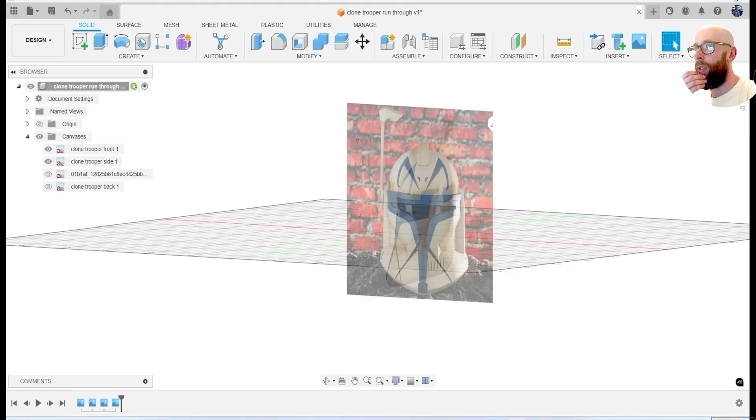Okay, so I've already got my reference images installed. So if you can't remember how to do that, make sure you go to Insert and Canvas. I'm going to put a link to where I found those reference images.

So starting off, to get the shape of the helmet, I'm dropping over to forms. I grabbed a quad ball, and what I'm going to do is just try and match the overall shape, delete the bottom part, grab that bottom edge, scale it flat, and then drag it down to get the overall shape. If you followed along to the Mandalorian helmet, you'll notice that originally what I did was a quad ball and then joined it with a cylinder. I found this basically cuts out that step.

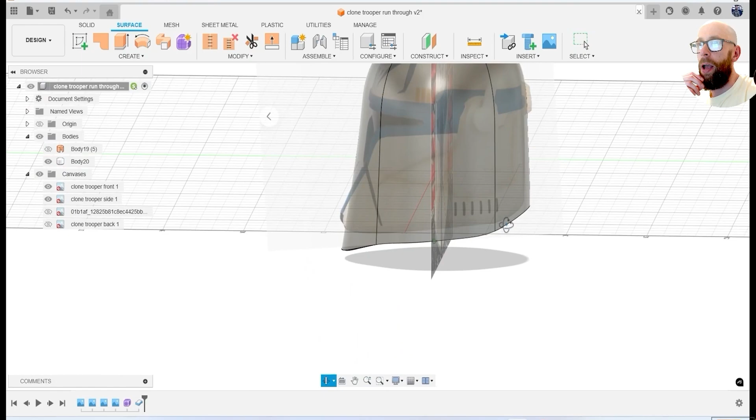Then making sure you select symmetry, it's just a case of dragging the vertices to match the overall shape as much as possible. It is worth every once in a while clicking finish form just to make sure that it does finish. Because if there's errors inside the form, it won't let you go past that point. Then into surface, and then thicken it a little bit just to make sure it's actually a solid shape.

And then it's a case of trying to cut some details into the front. So I start with the visor, I do an offset plane, and then I try and trace around the visor roughly where I want it to be, basically using a lot of lines, arcs, and then fillets just to round those all off a little bit. Now I will always do it on one side and mirror it over, because apart from the scope on the one side, the rest of it's completely symmetrical. So there's no sense trying to do it on both sides if it's not going to match up perfectly. So I do a lot of symmetry based stuff.

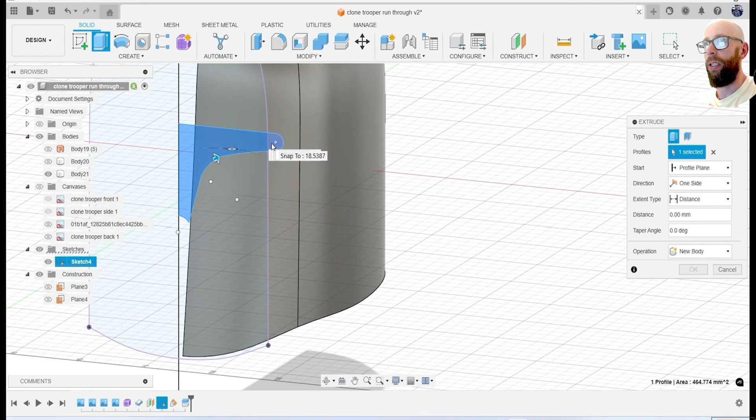So then it's a case of extruding through and cutting through the actual visor. We do the same sort of technique for the rest of the details, like the blue bits that you see, but rather than cutting, what we're going to do, and you'll see in a second, is do intersect. So when you're intersecting, you need to make sure that you copy and paste the original body you're going to cut through, because it will get rid of that.

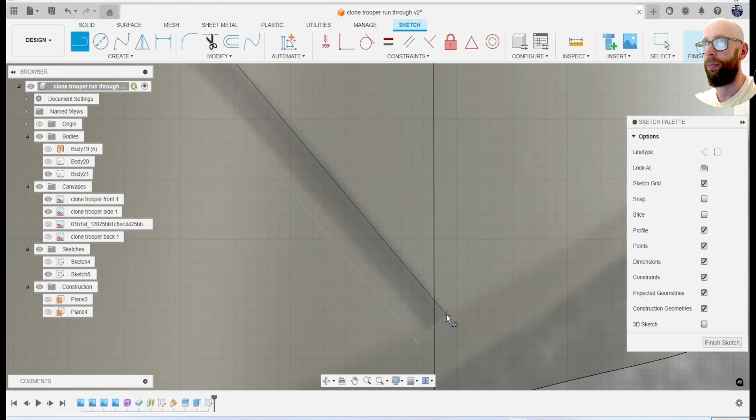So all I'm doing now is tracing around the rest of the details on the front of the face that I want to do. Again, lines and arcs, trying to match up as much as I can. If it doesn't meet it perfectly, it's not the end of the world. So you'll see, as I said, I'm only doing it on one side.

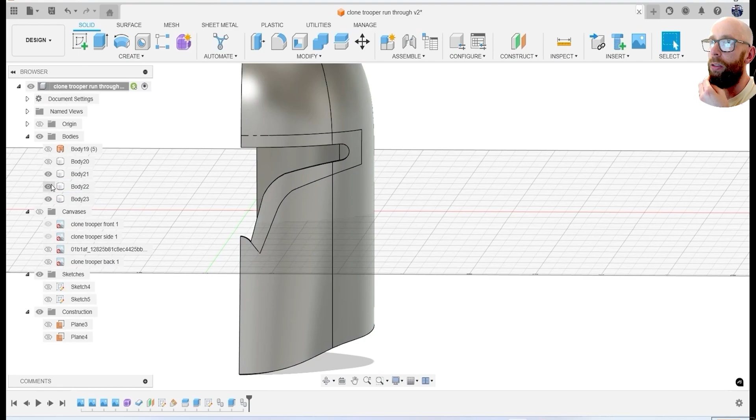Once I'm done, checking that it's all closed profile, and then it's a case of dragging it all, cutting through, and you see I change it there to intersect, so you end up with those extra little bits. Now originally I did it all as one, but then it joined it together, which I didn't want to do, so I ended up having to do each step individually. So copy and pasting the main part of the helmet a couple of times, just so you end up with that little detail there. And I do that for each one of those little bits that I want to stick out.

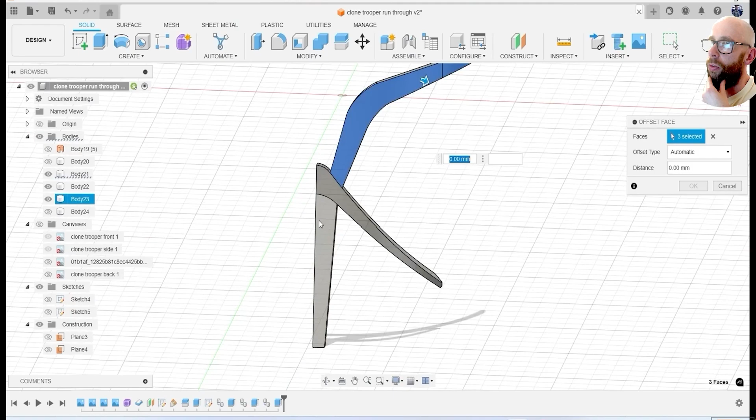Once you've got those little details, what I then wanted to do was press pull the faces to make them actually protrude out of the front of the face a little bit. So under modify, you've got press pull, click on all the faces and drag it out a little bit. You don't want to go too much. I only did like 1.2 mil in the end. You see it's starting to stick out a little bit. Same with the little bit there as well.

And then it's a case of rounding off the edges, trying to get those details as close as possible. And again, trying to do the bit at the top as well. You'll see me jump around a little bit. So I've started to do all the details on the front. And because I didn't know how far it was supposed to wrap around the whole helmet, I ended up jumping to the bit. So you see there, it kind of comes a bit too far. So I wasn't sure how far I needed to do it.

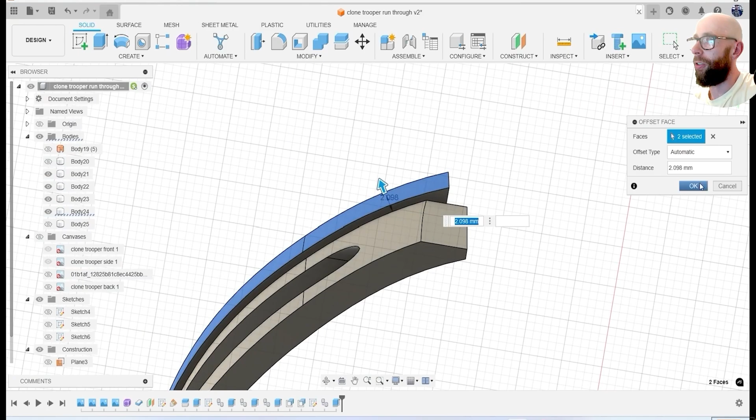So again, you'll see me do the same thing where I press pull to make it a bit thicker. But then after a bit of playing around, which is why I speed these up in the end, because otherwise it's just me sort of mumbling to myself as I'm trying to figure stuff out. So you see me sort of play around with it a little bit. I end up moving up to doing the bit that you see on the side of the helmet.

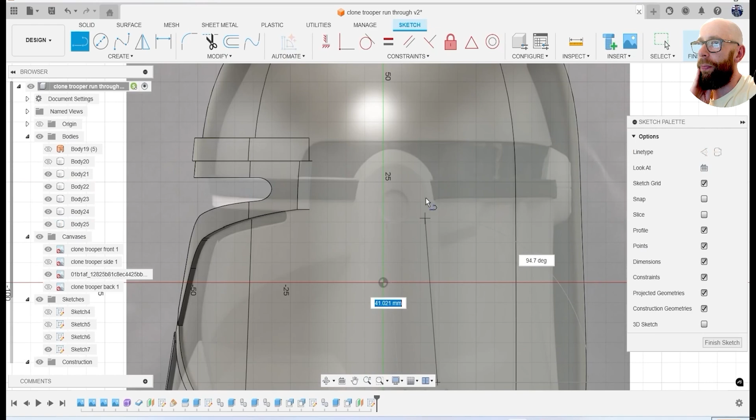So again, offset plane, create a sketch, start tracing out roughly where I want this detail to be. Basically, when I'm sketching, it's all lines, it's all circles, it's all arcs. So originally, I thought it looked a little bit too big, so I tried an arc, and it looked a little bit weird. So I jumped back to a circle in the end. But the good thing is you've got two point circles, so you can make both points match up perfectly.

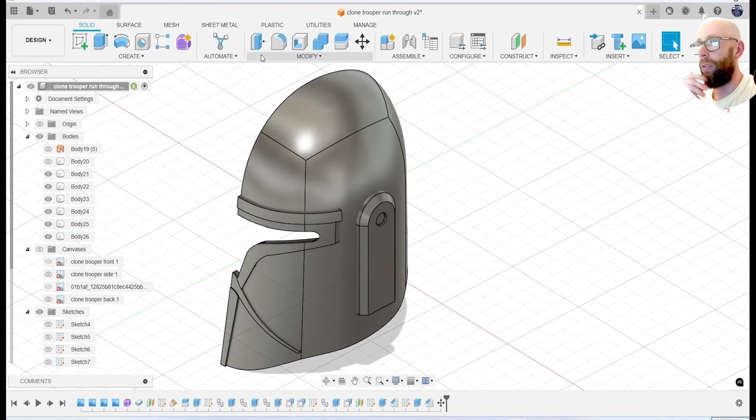Extruding it away so it's its own separate body to begin with. Then it's a case of trying to get the shape, so chamfering, drawing more sketches, cutting those details in a little bit more. And then I'll mirror this over because on both sides it's symmetrical. It's just on one side you've got the scope that comes down a little bit. Bringing that into position, because you'll see on the final model, those blue bits above the visor are supposed to match up to where that side part of the helmet is.

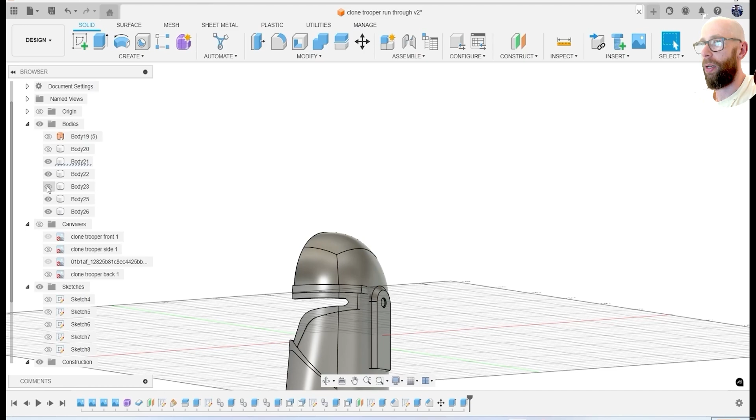So it was a case of trying to press pull, drag it through. It didn't really work. So what I did was I extruded it up to there a little bit, and then did the same on this one. And what I then tried to do was press pull. Sorry, come back in a second. And filleted. Oh, there we go. So I was trying to press pull that up so it matched up as much as possible. I'll do the same on the other bit as well. So this is why when I'm doing it, I tend to jump around a little bit, try and match it up as best as I can.

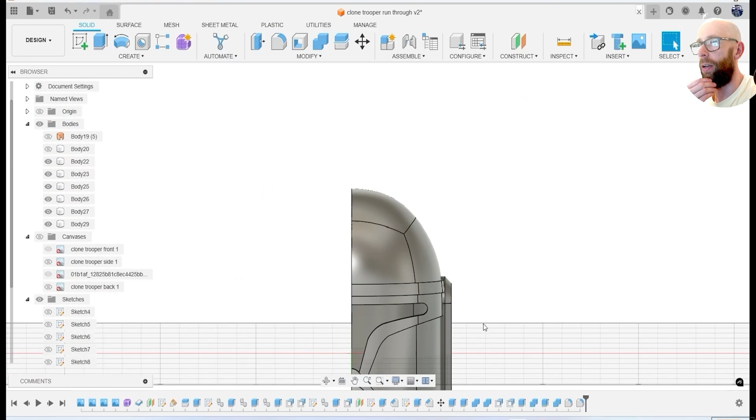And then because we're nearly there, I just grabbed it and extruded it, dragged it out a little bit. Do the same on the bottom piece. Drag it in a little bit, and because it's a little bit square, or not square, but you had that sharp edge, I just filleted that to bring it round. Do the same on the top bit as well. So just hitting F to fillet and dragging that down to make it match up. So that was pretty much the front part above the visor done. So you see it's starting to take shape a little bit.

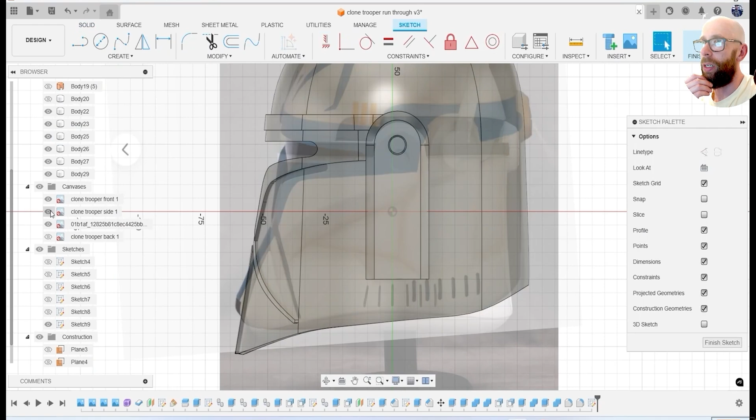You also see me randomly save a couple of times. Obviously autosave kicks in, but I'd never fully trust autosave just in case something crashes. I've had projects in the past like the R2D2 one that crashed loads and I lost loads of work, and I've been jaded ever since.

So what I then had to go about trying to do was that little cut, I guess, where the cheeks would be. I tried a few different ways.

This one didn't quite work how I wanted it to, so you'll probably see me jump around a little bit. I was trying to find the best way of doing that. This method isn't the bit that actually ends up being used. I end up doing a similar method to how I did the front bit where the visor is, where I do a triangle and cut it from the front rather than the side.

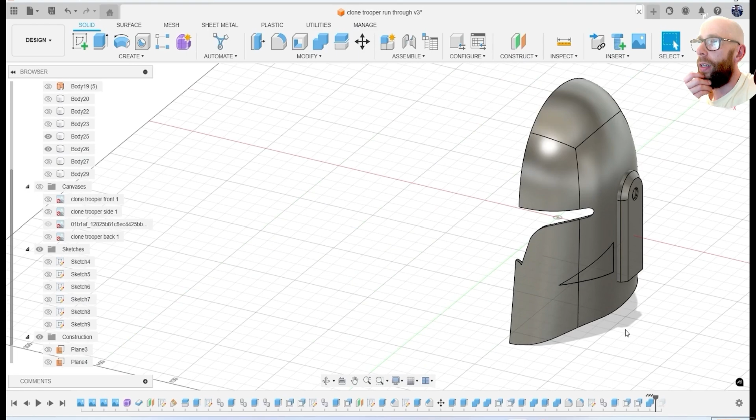That's why I've decided to record me doing it and then annotate over the top of it, because the whole video was about 2 hours 45, and I don't think anyone wants to hear me mumble along for that long.

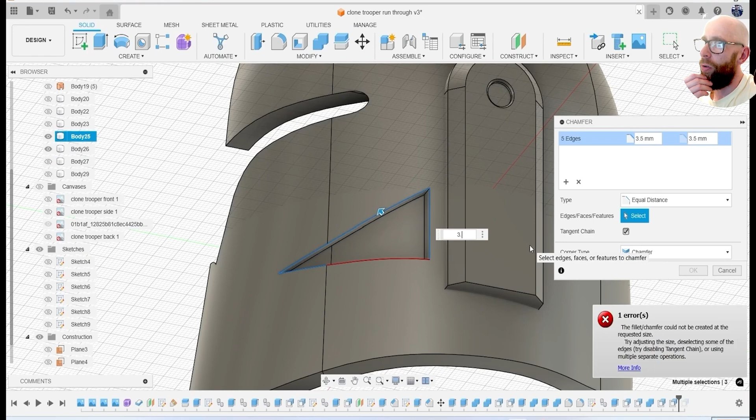So I tried to thicken it a little bit. Didn't really quite work how I wanted to. We're getting roughly the idea, but then you'll see that I completely scrap what I was doing anyway and change my mind because it kept not looking right really. So you see me delete everything I just did at the front there.

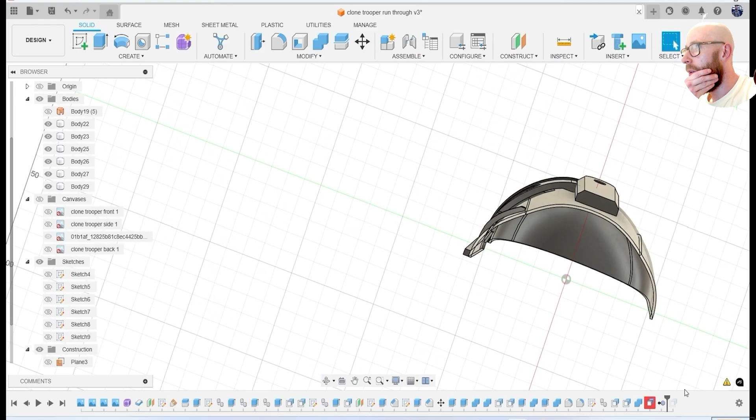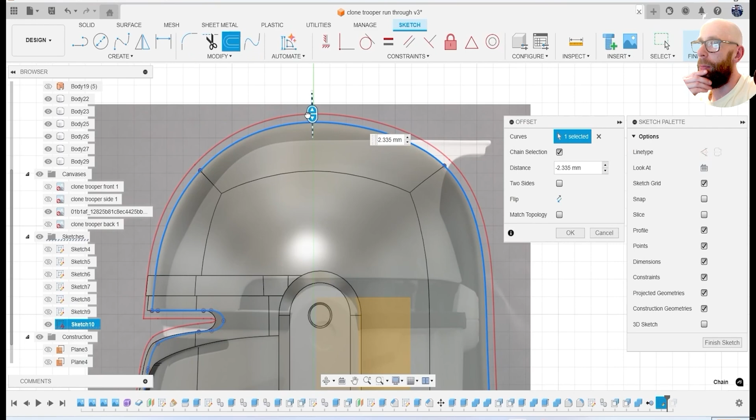Then I move on to doing some of the detail like the bit at the top, which was quite a simple thing to do. I started a sketch, I projected the overall shape of the helmet and traced roughly that top bit of the helmet, using sketches and fillets to round that off a little bit. The whole reason of projecting and then offsetting is to make sure it actually matches the curve of the helmet perfectly.

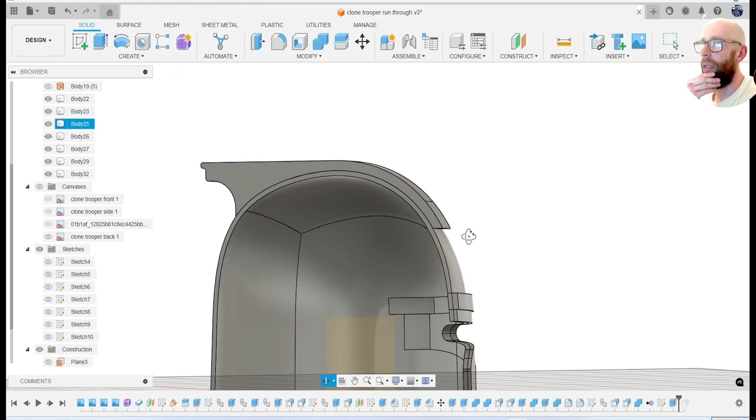Trying to then figure out how far along the front of the crown of the helmet I want it to come across. And then extruding it along, setting it as a new body so it doesn't join it together. Remembering that it's going to be mirrored across anyway. So that was about right to where we needed it to be. Filleting just to get rid of any super sharp corners.

I do end up at the end of the whole model going around and filleting all the extra sharp edges. So if you wonder why I'm not doing it now, it's because sometimes when I do it as I'm going along, you end up causing more difficulties later on.

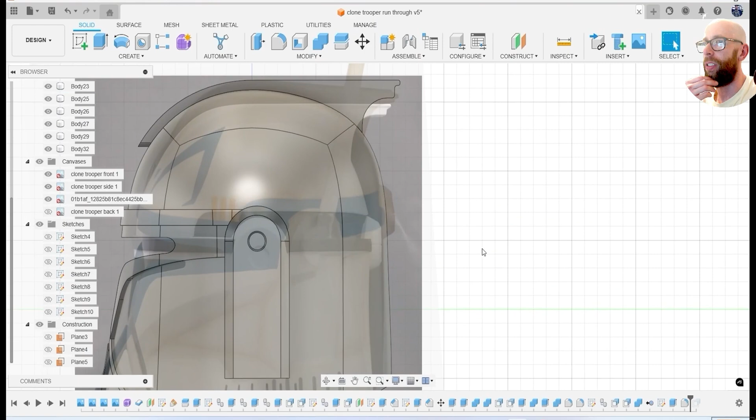So once I've done with that, I then started adding in those other details, like where the blue trim is, and it's the same technique that I used before where I do a sketch and then extrude to cut it in, but then do the intersect like before. So I've made sure I've got that shape.

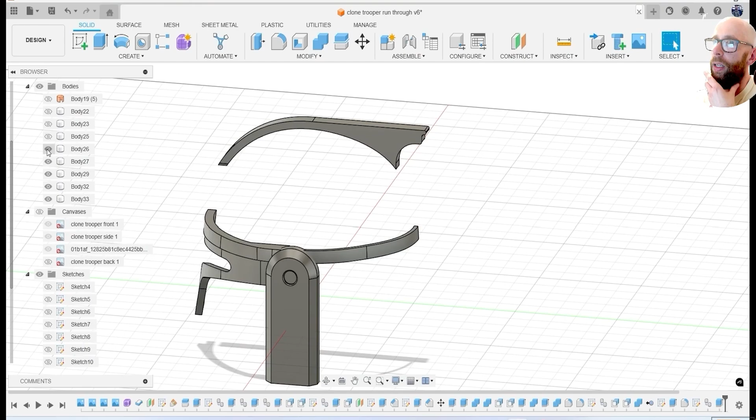Once again, it's sketches, extrude, fillets to get the overall shape, copy and pasting the original helmet, and then I'll extrude it through, and make sure I set it to intersect to get exactly that part. So there, change it to intersect. So I've got that piece. You see all the bits of trim are starting to come together quite nicely.

And again, press pulling, roughly trying to match the bit I did at the front there. And then I have to do that again for the bit with the bigger curve at the top as well. So copying and pasting that one, extruding it and then intersecting, and again, press pulling it. It's the same technique. A lot of these things, it's the same technique, rinse and repeat.

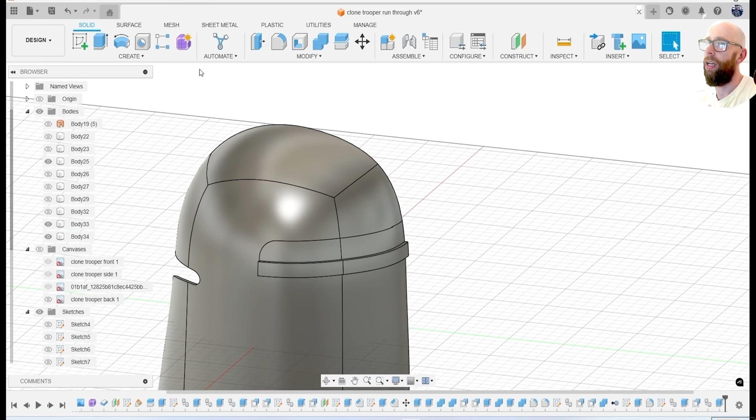I've found doing a lot of the Star Wars helmets, once you know the techniques, it's not that difficult, it's just a little bit repetitive with some of the tasks. The only one that's been really difficult was the Stormtrooper one. So then I'm just press pulling a little bit to make the bit of the ears a little bit thicker. You can see it's slowly starting to get the right sort of shape that we need.

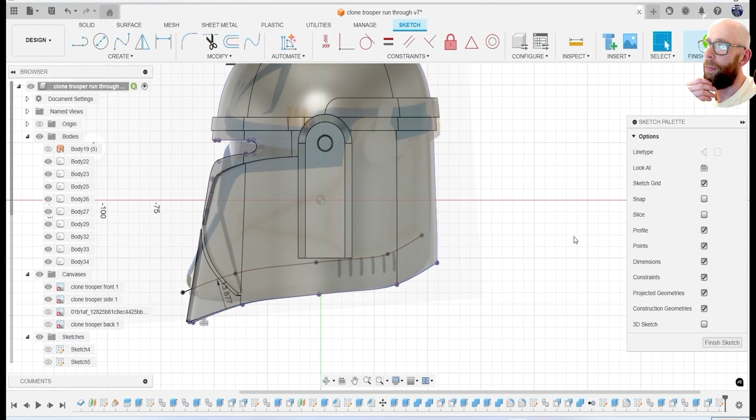Next what I was trying to do was the bit at the bottom of the helmet where it flares out a little bit. I wanted to get a line across so that I could split that body. And then what I'm going to do, again, is press pull to drag that out.

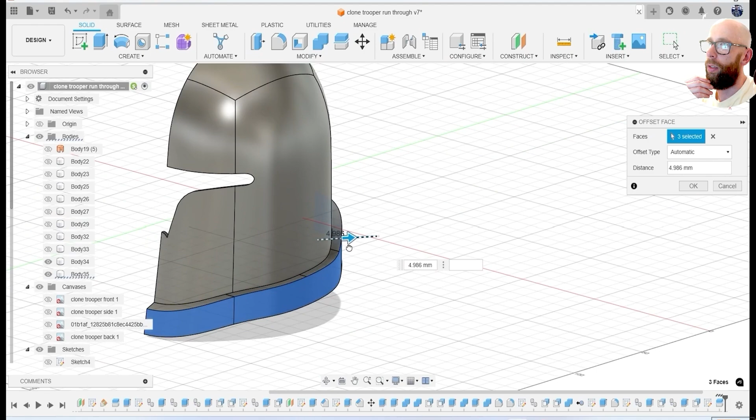So drag that out a little bit, and then I chamfer to sort of make it blend in the shape a little bit more. Something like that. And then I end up filleting it as well, just to get rid of any really sharp edges.

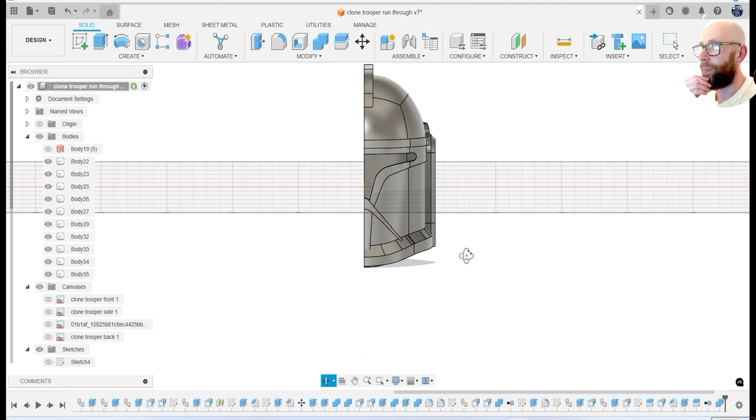Remembering that we're only doing half of it, because once we mirror everything across, it becomes infinitely easier. I have got myself in the habit of trying to press pull everything just to see how far. Obviously, there's a limit with Fusion, it will tell you off eventually if it ends up doing it too much. I then brought the rest of the rear down, same thing, press pull to bring that down, and then join that together. So you notice that nothing at the minute is joined.

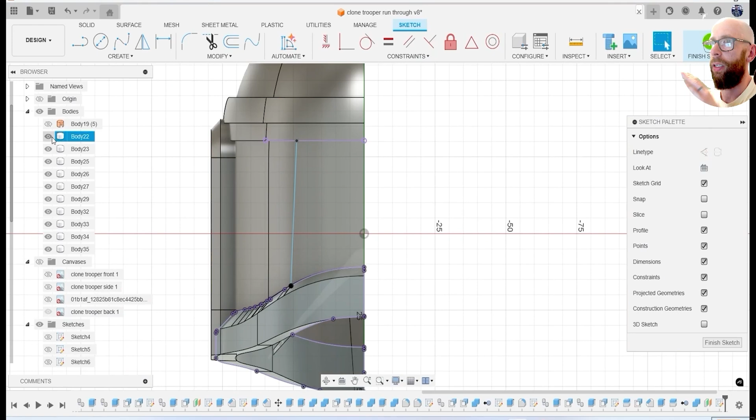I do join all the stuff that needs to be together at the end when the modeling side is all done. Then what I do is start to move to doing the details at the back. So it's relatively simple. What I try and do, as before, is draw roughly the shape I want, and I'm going to extrude it in and intersect it again. As I said, it's a lot of the same techniques. And roughly get the shape that we want. And then press pull again, bring everything out.

Now you'll see what I do in a little bit. I get stuck for a while because I'm trying to make the bottom of that bit I've just pulled out match the trim along the bottom. I kind of abandoned that in the end because it's not how it was on the reference images, but it's not the end of the world. It still looks good, which was the main thing we were looking for.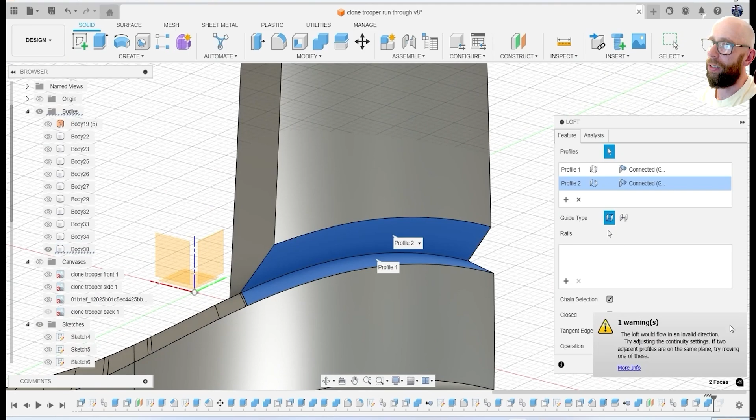But I tried lofting a couple of times, it wasn't really cooperating. And then, because I joined it together, I was trying to delete a face or replace faces. It didn't quite work as well. So much like with certain parts, try it for a little bit, get frustrated, abandon it, move on to something else, which is what you see me play around with for ages.

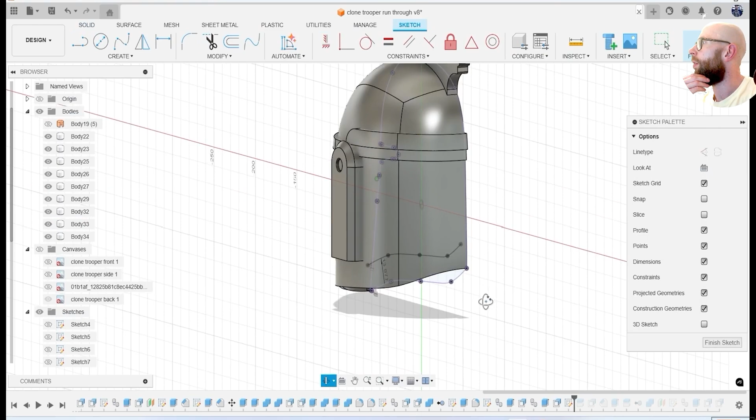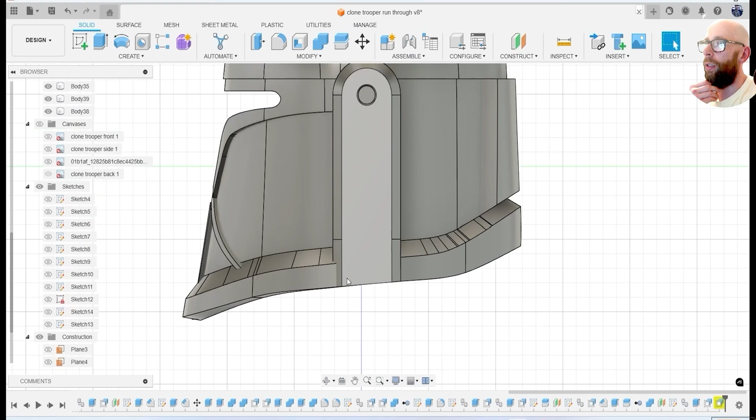So it's the same sort of thing. We could continue to try and play around with this part repeatedly, because then I tried to join them together and then press pull as they were joined, and that didn't work. You see it get an error in a second. Yeah, so tried that, and at the end I abandoned the bit I was going for because what I had there looked fine. So you see it's starting to take pretty good shape now.

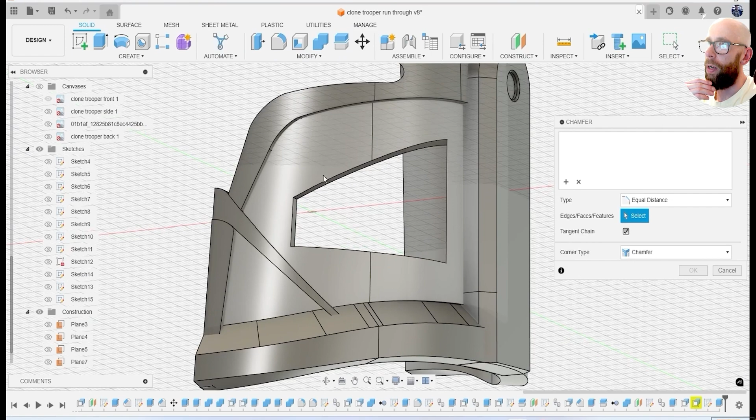So this is now where I start to do detailing for the inset of the cheek a little bit. I've cut from the front rather than the side, so I get a bit more of the shape that I want. So there I was chamfering it and it was not really doing it. It's because there's a duplicate of the body underneath it. So I got rid of it and then chamfered it, playing with the two distance so I can push it further out without going too deep. So you still get that chamfered look a little bit.

Now you'll see, obviously, there's going to be a gap now where that is, the same as with the visor and the bit at the back as well. We will sort that out later. I was just trying to get the overall shape and the cutouts done to begin with, because we've got the original body, the surface from when we did our form. We can go back and change that loads anyway, so it's not actually a big deal.

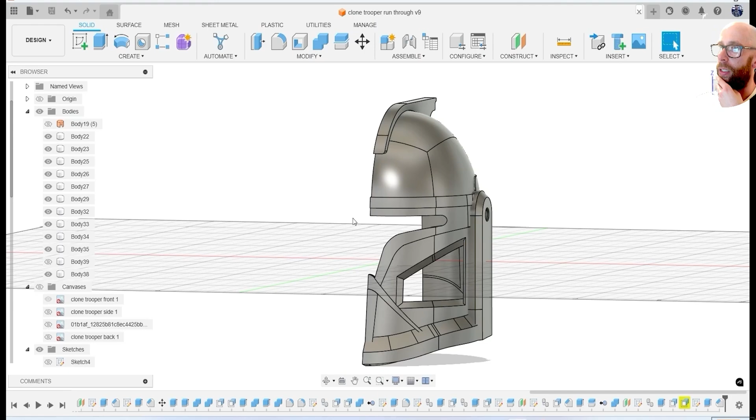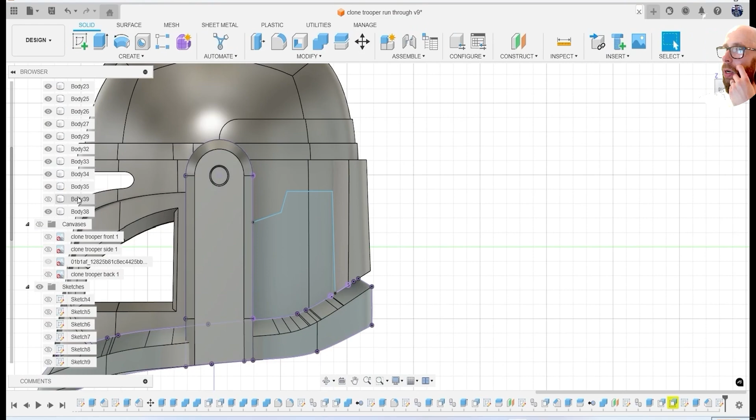So this is the same as the inset on the cheek as well. Same sort of thing. So cutting through, duplicating the body, setting it to cut that out, and then I have these little bits that I was trying to delete. Sometimes just selecting a surface and deleting it works. Sometimes it doesn't. So all I ended up doing then was drawing a random shape just to cut it away as a cutting tool. Sometimes with Fusion, you need to try and outsmart it a little bit. And again, chamfering, but doing a two distance so that I can put the width of the chamfer further than the depth of the chamfer, if that makes sense.

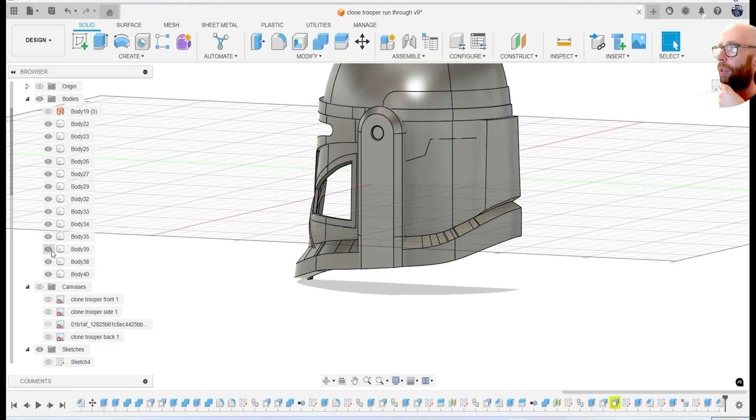So bringing everything in, you can see there we've got the details. Save everything again because I don't trust autosave. So you'll see that I'm going to slowly start trying to fillet loads of little details. I then play around with this area again because it's still bugging me. I think I ended up chamfering it, but nowhere near as much as I was playing around with it. Clearly, it was bothering me as I was doing it, so I was tinkering loads and loads.

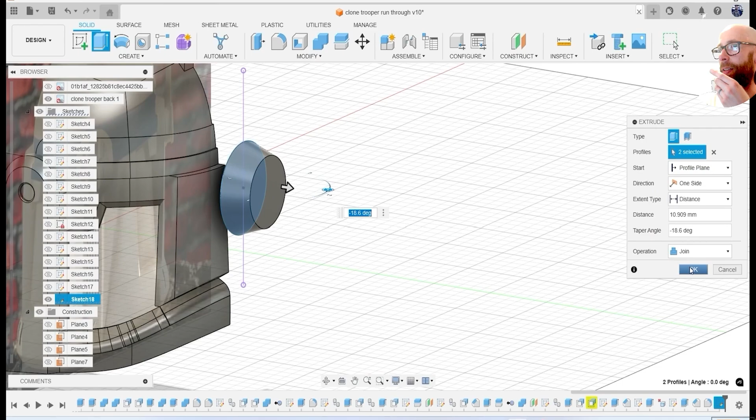So we've got most of the details done now. So now it's a case of adding the last little bits in. So doing a sketch, doing a circle. As you extrude it through, you can play with a little widget to make it like a draft angle of it. Made it a little bit too big to begin with, but the benefit of Fusion, obviously, I can go back to the original sketch, drag it down, make it a little bit smaller.

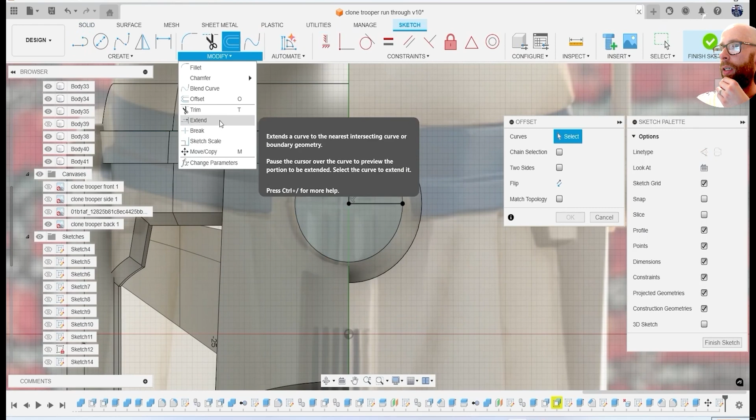Again, starting to cut those little details in. So the whole idea here is just so I can draw a line and then offset it and use that to cut those little details down. And then you see those little extra faces. This is where you can select the face, hit delete. Most of the time it works okay. So try it. Sometimes it doesn't though. I've never figured out why sometimes it doesn't, but it is what it is.

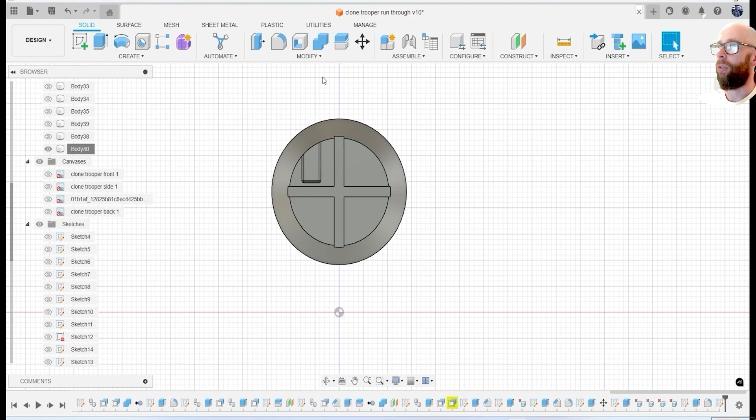And so what I then do here is draw a rectangle but drag it up. And the idea being that originally I was gonna circular pattern it, which you see now. But what I ended up doing was splitting it in quarters and then mirroring it across. So I still attempt to do the circular pattern a couple of times. Realize that's not going to work. So what I then do is go to construct mid plane to make a plane in the middle of each of those little channels, so I can split it all apart, mirror it across.

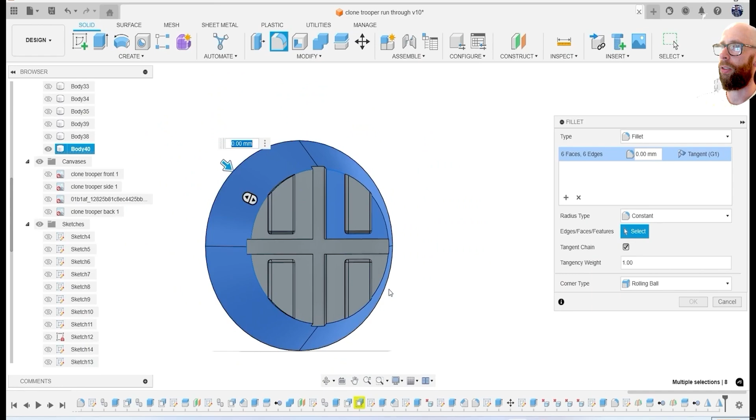So then I can just get rid of those, mirror, and mirror at the bottom. So we've got that. You see those extra lines there? It's because we've got overlapping faces. So originally I try and fill it in, it doesn't quite work because we've got all those little extra faces. So I just select those faces, hit delete to get rid of them. Like that. So that bit is done. Then added a little fillet just to get rid of any sharp edges to everything.

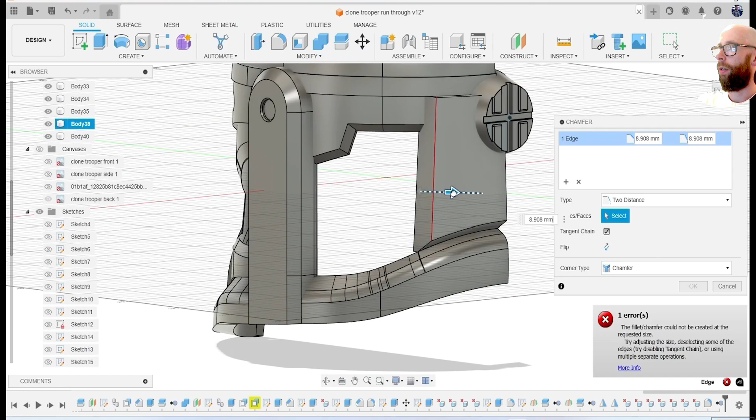Again, still playing around with the chamfers on the back piece. I do end up chamfering it properly in the end after I can't get the look that I like.

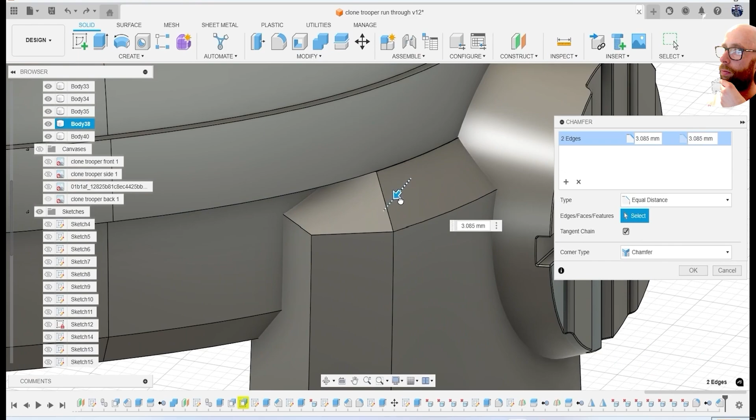So then what you see me start to do is try and start mirroring everything over, because we're pretty much done with the overall shape of it all. So there's some bits that overlap on both sides of the bit at the back. You see how it goes over both. So it's a case of just mirroring everything across. And here is where I start to add those little bits.

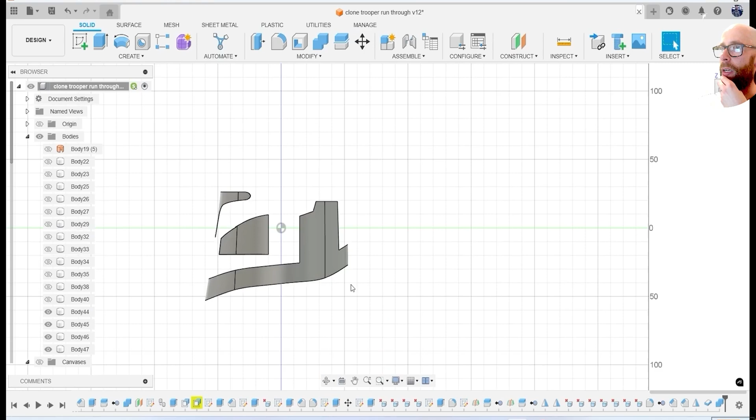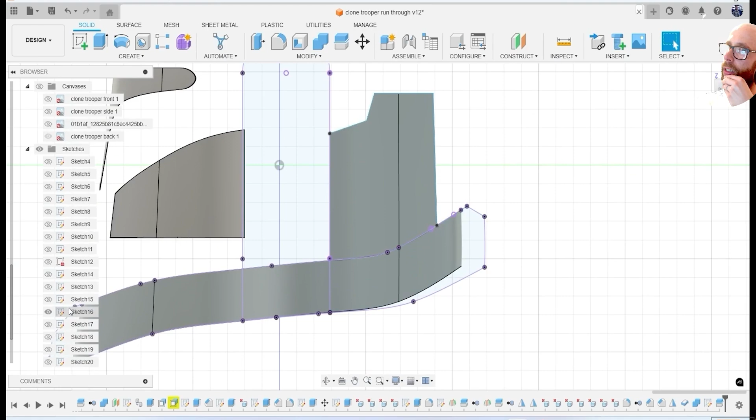So with the visor and the cheek and the back bit, I take the original body, extrude it inwards and do a combined cut to get those extra little bits. And then I just draw a little sketch just to get rid of that bottom bit of the trim that we don't want. So I end up tracing around just so I can split the body, and then I can get rid of this bit that I don't want like that. So that gives me those two bits there. So it now fills in where the cheeks and the back of the helmet were.

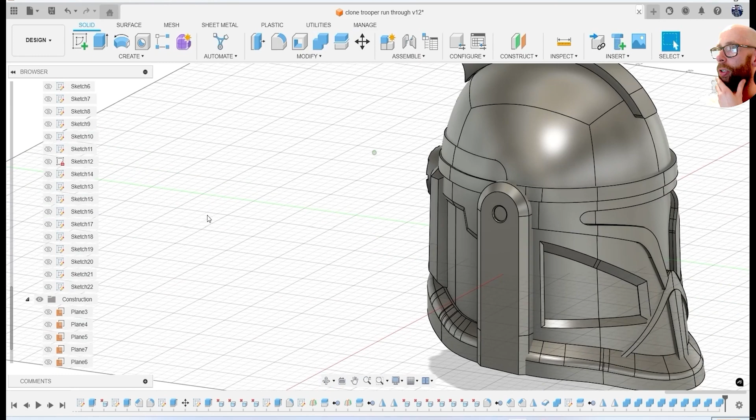Then it's a case of trying to mirror all the other details across. Now originally I always set it to new body rather than join, because it'll join everything together. Then it's a case of going through and trying to combine everything, making sure I set it so don't keep the body, so just combining all the bits that I want to be one solid piece. Keeping in mind, one, probably going to end up 3D printing it, and two, texturing it in Blender as well. So anything that I want to have a different texture, I make sure I keep as a separate body.

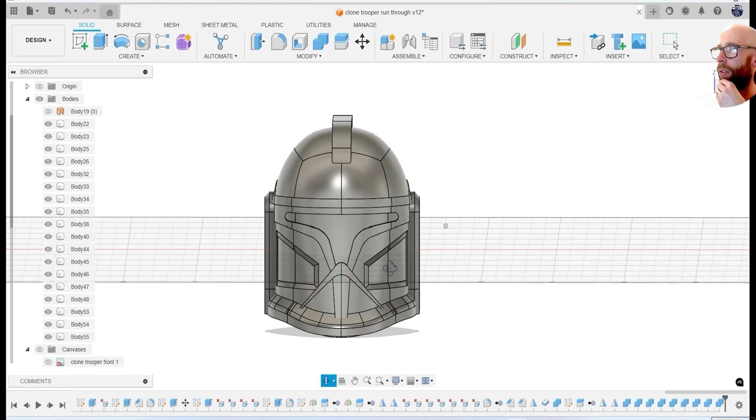So pretty much done with most of the shape of everything. So you'll see me play around a little bit. I've obviously still got to do the scope bit on the right hand side as well. So all I'm doing now is going through, everything is now combined. I got rid of all the extra bodies that we don't need. So I then start to do the detailing of the scope on the right hand side.

And again, it's just a case of extruding, bringing it through. Then what I do is a tangent plane, so I can draw basically on the surface of that cylinder, cutting little details in here so it looks like it can move around, and then press pulling to bring that in a little bit and combining it back together again.

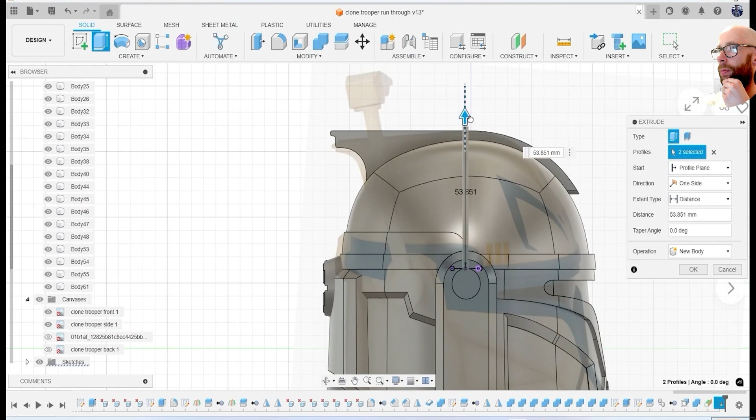Drawing another cylinder in the middle, dragging it up to the height we need. Again, I press pull to bring that down, and then press pull to make that a little bit of a thicker cylinder, like that.

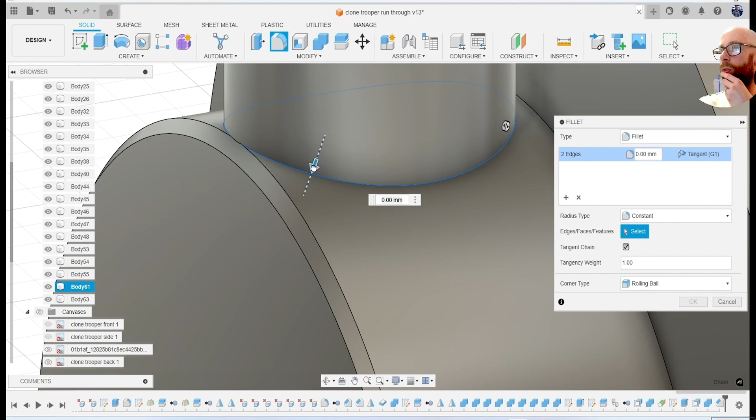Cutting the little details in, combining, cutting. You go combine, target body for what you're going to cut into, tool body for the bit you're going to use, and then cut but keep the tool, because I want to keep the actual stem of the scope. I have no idea if that's the right name for the part, by the way, I'm just going with what makes sense.

When I did this, the whole point was to try and get one. I had a construction plane in the middle. I could have just done axis through a cylinder and done a plane at an angle instead, so I kind of did an extra step for no reason there.

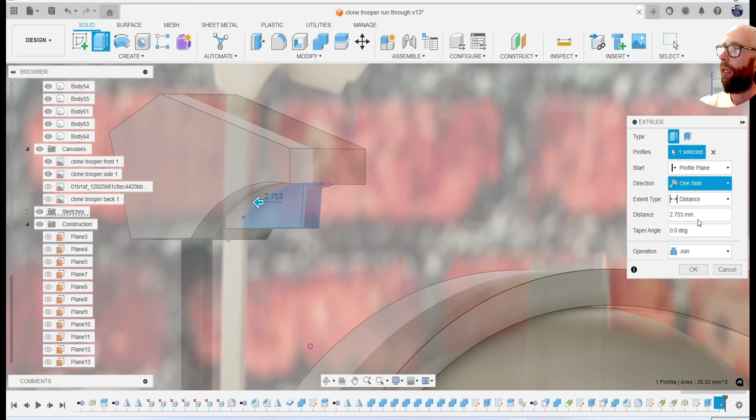Here I'm just roughly pointing out the shape I want it to be. Change it to new body, using that plane directly in the middle so it'll be exactly where it needs to be, and then doing it symmetrically, like that, and then filleting all the edges to make sure it's rounded off nicely.

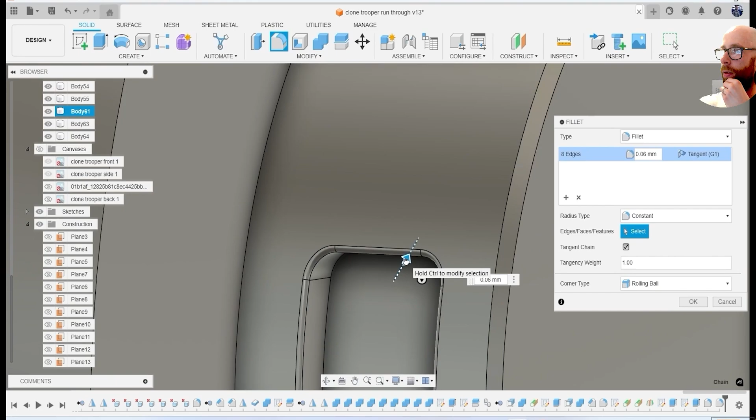So what I'll then do for a while is go around and fillet quite a few parts. You might find fillets where you get that red line where it's not working, so sometimes just start with the smallest possible fillet you can do.

Here I'm clearing up all the extra interfering faces where there's overlapping bits I want to get rid of. So again, it's combine, cut, selecting the bit I want to cut off and the bit I want to do it with, but making sure I keep it so I don't accidentally delete anything.

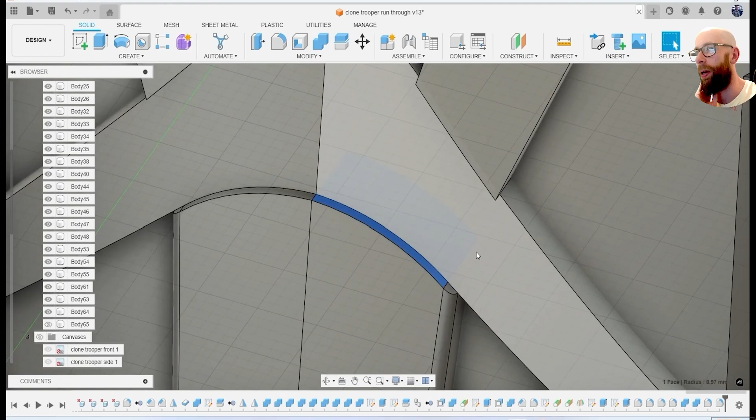Going around and just filleting everything. You don't want to go too heavy with fillets in terms of a massive fillet, but you do want to fillet all your edges. You don't want to keep sharp edges when bringing it over from Fusion into Blender or for 3D printing, because it doesn't look right. So you always want to have even a small fillet, that's fine.

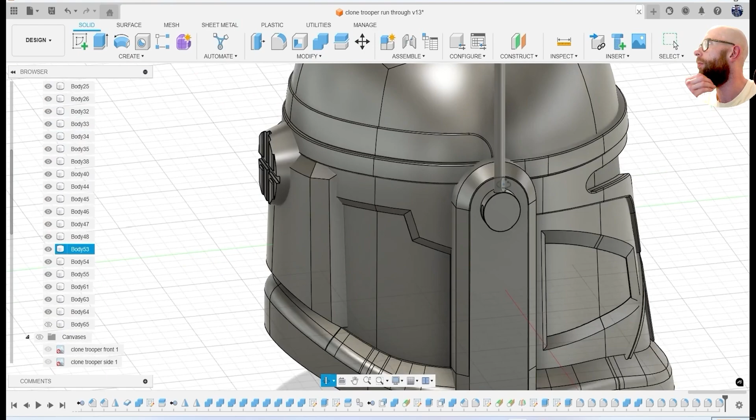So again, just working my way around, trying to fillet all the edges I can.

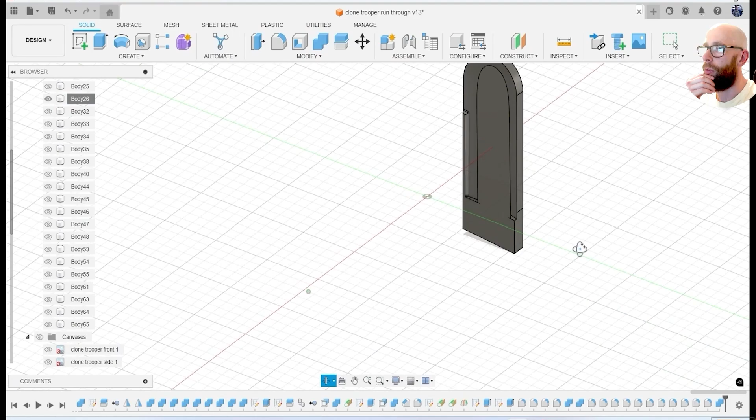And then combine cutting to get rid of all the extra little bits we don't want, so it all meets up quite nicely, nice and easy for texture. And then the last bit really is to do the detailing at the back, like the little channel at the back of the helmet, back of the head.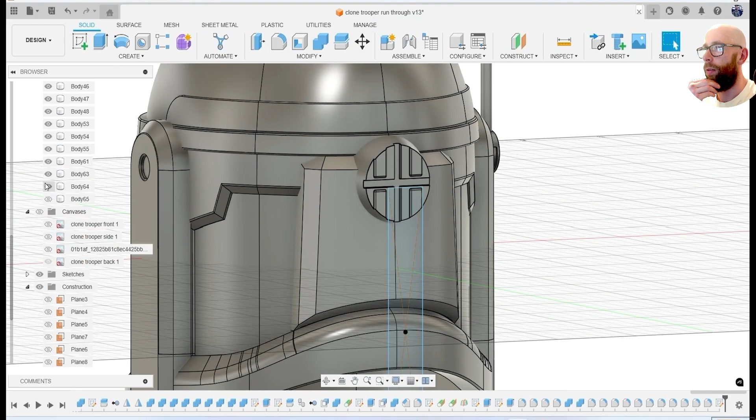That's just extruding and then cutting through, but just a plain cut. We don't need to do intersection or anything like that, just cutting through.

And dragging one, and then what you can do is a rectangular pattern, so you can do loads of them at the same time, and then just filleting, rounding off all those edges a little bit, like that.

Then it's a case of going around, tidying everything up, deleting all the extra little bits we don't need. So lots of combine cutting so the bits that are intersecting actually cut into each other properly, and then just clicking extra faces and deleting.

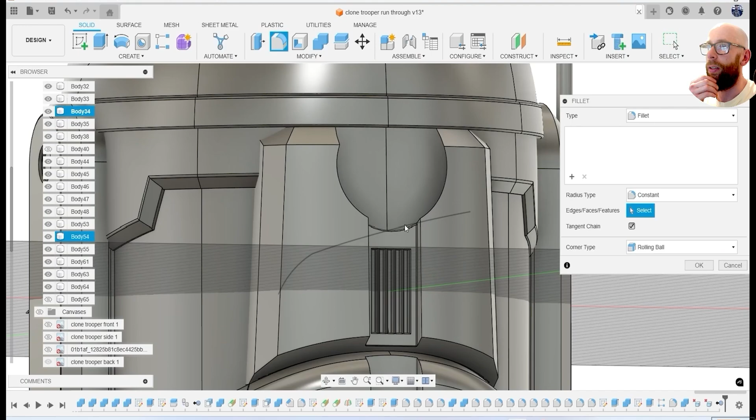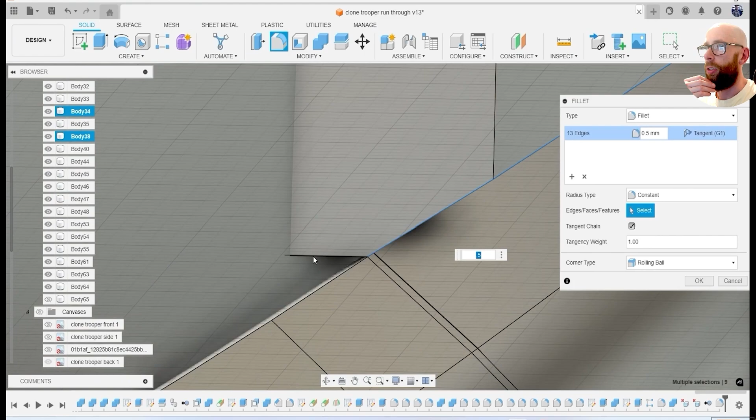So you see me going around a lot, combine cutting, and then filleting all the edges so there's a nice look to it all. A lot of that is it's just the same all the way around. Filleting any last little bits of edges so we've got nice looks to them, and then combine cutting any of the bits so everything lines up perfectly.

Because there's loads of little bits of face and things we aren't going to need, and then filleting. Now some of these fillets you actually wouldn't have ended up being able to see anyway, but I'd have known they were there, so it would have bothered me if I hadn't done it. And then also, if I do end up 3D printing it, or you end up 3D printing it as you've done it, bits will fit together nicely.

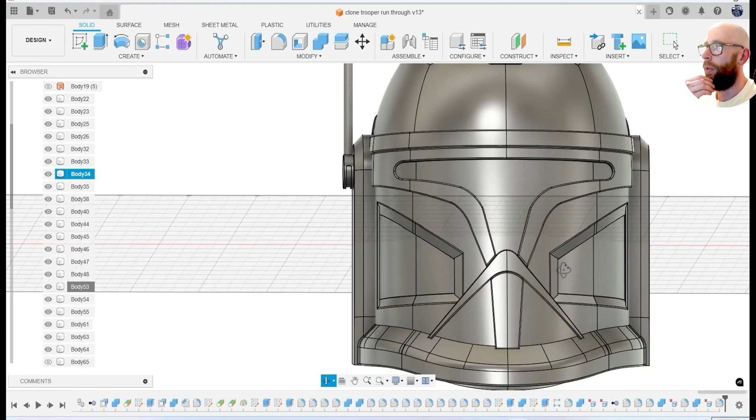Okay, so just going over the whole model, checking I'm happy with everything. Then one of the last things I end up doing is on the inside - you see I've got those overlapping inside bits.

So what I do is use the original body and use that as a cutting tool to get rid of all those overlaps on the inside. Because you're going to have intersecting pieces, it's fine, but we don't want, if you see there, those big blocks sticking through.

So you see me take the original body and thicken that a little bit, play around with it. At first I thought about just making it really thick, but that wouldn't really be that good. So I've now got this body here as a cutting tool.

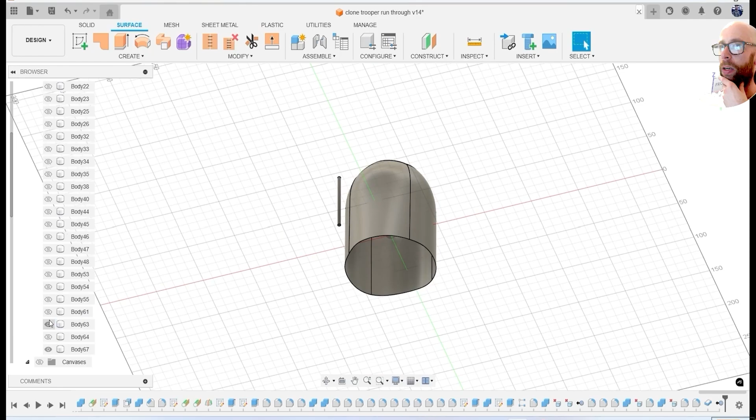So then all I do is bring each body back, and each time it intersects like this, I go to combine, cut, grab the tool, grab the body I want to cut, and grab the overall shape of the cutting tool, and then cut but keep that. I work my way through all the bodies like that, so they all match up.

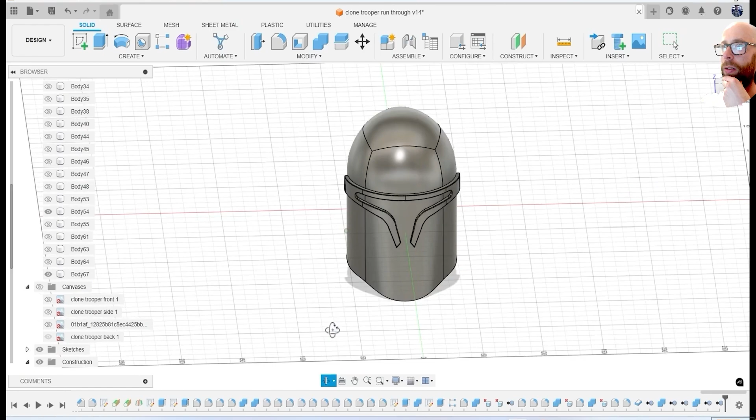So it gets rid of all those extra little bits, then grabbing the extra bodies we don't want and right clicking to remove them. It's worth always, in this case it probably wouldn't matter, but rather than deleting, right click and remove, because if you delete it can mess up bits in the timeline at the bottom of Fusion, so you end up with loads of red errors for any actions you've done. As long as you go on remove, it gets rid of that properly.

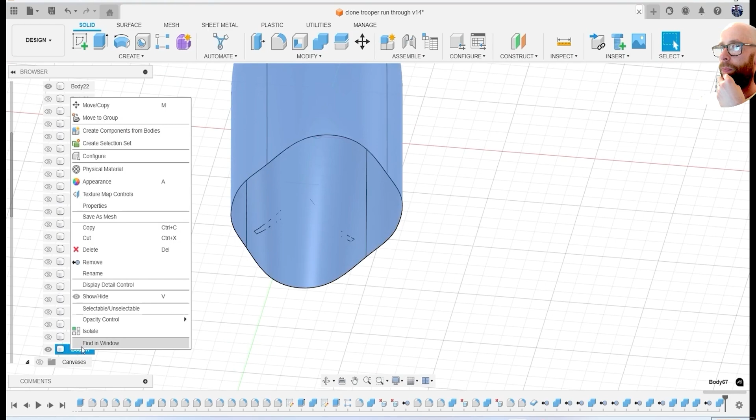Okay, so then I bring everything back, give everything one more once over, check I'm happy with everything. That's looking pretty much where we need it to be. So in that case, make sure I save everything and go to export all.

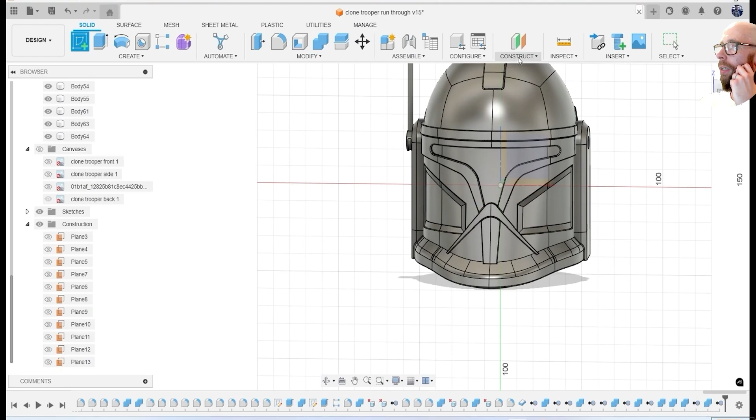Oh no, the last thing I start to do, sorry, is there are little details along the side of the helmet that I forgot to do. Now the first thing I try and do is an emboss, which I do, but first of all it took Fusion like 15 minutes to try and do it. And I got - so here's where I try and do an emboss, but it actually ends up eventually doing it.

But it took ages to think about it, and I got worried it was going to crash because it's a weird surface - it's not perfectly cylindrical or perfectly straight, so I get some weird effects. Actually it's sped up now, but at full speed that took like 15 minutes trying to do it, so it looked quite funky, which I didn't really like. Even sped up - this is 3.5 times speed - that's still taking ages.

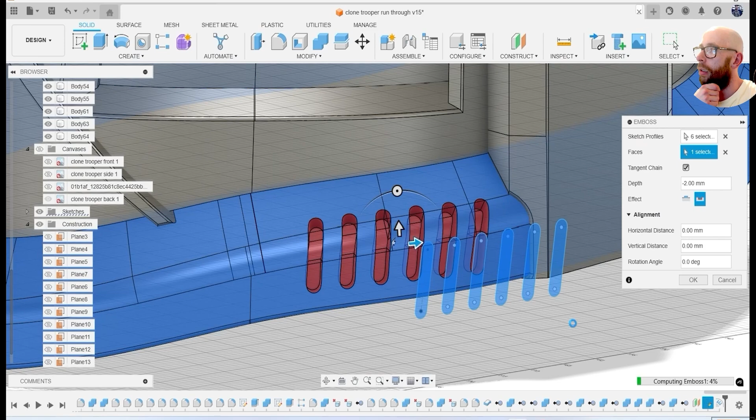So in the end I abandoned doing it this way and actually cut it into the side area bit because it doesn't look all that great there. So I try and fillet it and I get some results that don't look great, so I'm just deleting the features.

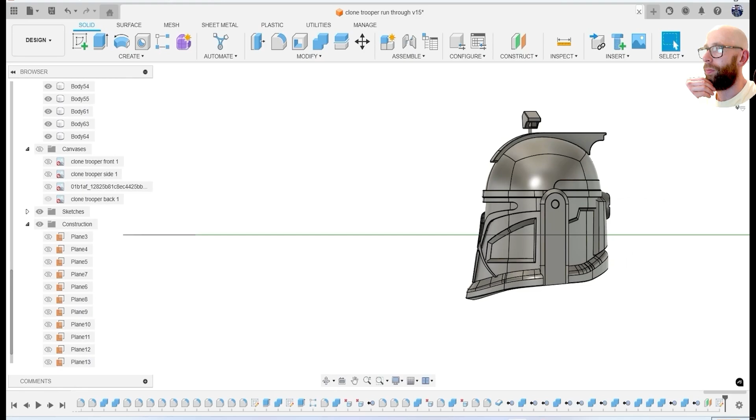I decide to just do it on this bit here, the bit where along where the ear is, and do it that way - do one and then fillet it and then pattern it across like that, and then I'll do the same on the other side.

Now I could have just mirrored that body over, but at the time, I don't know why I didn't - I just wasn't thinking. And then same thing, pattern across like that. Again, going through checking everything is good.

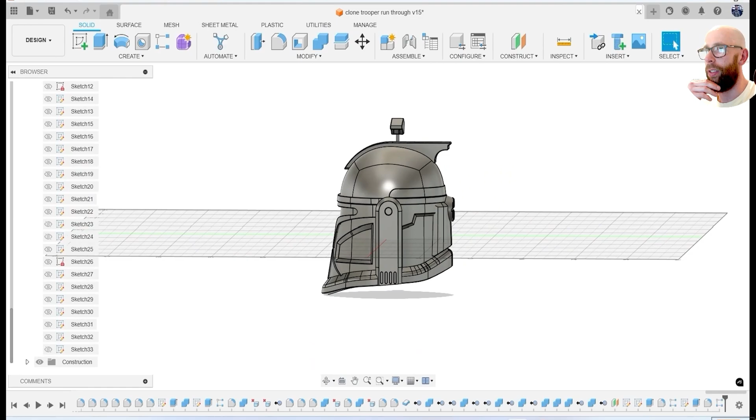Then when I'm happy with everything, save all, file, export, and change it to FBX. Then we jump over to Blender to go texture it. So that's a case of selecting everything, bringing it in as FBX. Now I use Blender Kit to apply materials to everything.

To begin with, I add a few lights in just so you can see how it's all going to start looking. I like to do a rim light at the back and then two lights from the side just to show it off a little bit. For texture I use Blender Kit, which is completely free to apply all materials.

I do have a couple of paid add-ons that I use to help with detailing. I use something called One Click Age that lets you add things like edge wear and grunge. I've also recently bought something called Fluent Materializer. You'll see me play around with it a little bit, I'm still trying to figure out how to use it properly, but it lets you add some good details. So I'm trying to get a good view of where I want everything to be lighting wise, and then you'll see me start to add some materials in a minute.

I also forgot to say I use an add-on called Images Decal, which lets you add decals like stickers onto it as well. That one is free, so only one of the three is paid. The two free ones are Blender Kit and Images Decal, and the paid one is One Click Age on Blender Market, which is now Super Hive, I think - I can't remember off the top of my head the new name for it. They recently changed their name.